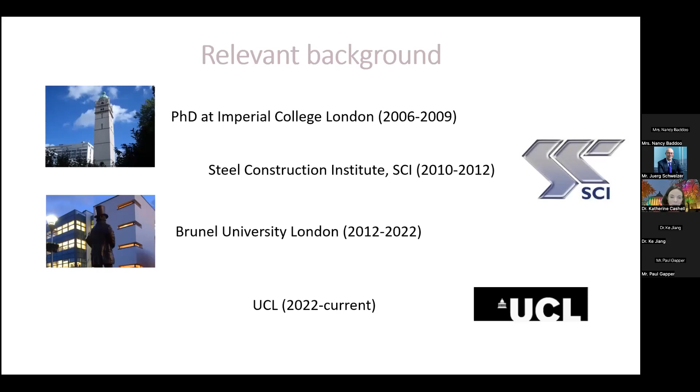It was really only in very recent years that we started to delve a little more into rebar, and I currently work at UCL. My own research background and the topics I spend a lot of time thinking about: my real background is in steel and composite structures, with a particular focus on structural fire engineering - a lot of testing, numerical analysis, design methods. In more recent years, we've started to do a lot more work into different types of materials, particularly stainless steel, but also high strength steels, FRPs, new shapes - anything which can lower the carbon footprint of the structures we're designing. Stainless steel has a big role to play in that endeavor.

I'll put this out here straight away: what I am not is a corrosion expert. I am absolutely not someone who knows a huge amount about corrosion in any context, particularly the different types of corrosion - this can be quite a complex subject for bare stainless steel, but also for rebar. But we'll touch a little more on that as we go through today's presentation.

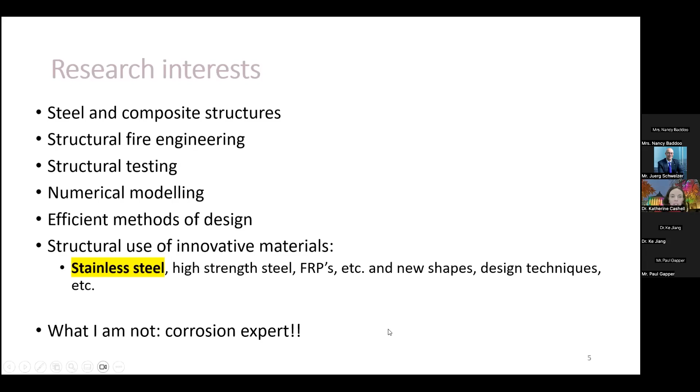Often those two things, the sustainability and the resilience under extreme loading conditions, can be quite conflicting, in the sense that our way of making something more resilient is often to use more material, which of course is unsustainable. It's in that context that materials like stainless steel have a very important role to play, because they can achieve both things when used appropriately.

But of course, we need a lot of research and data in order to enable us to use it effectively and efficiently.

I quite like this quote, which is why I included it here, which says that in a future of scarce raw materials and an energy crisis, it is both uneconomical and irresponsible to employ materials other than those which offer the maximum potential. So that's where I come at my research for stainless steel, which is that we're using a material which is a finite resource, but if we use it carefully and effectively and efficiently, and exploit all of its excellent characteristics in design, it can lead to a better outcome.

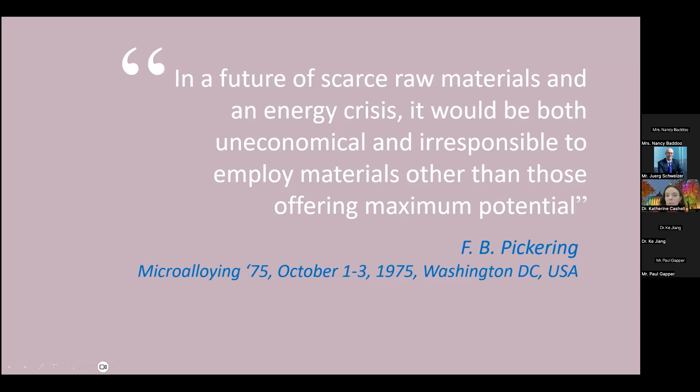Moving a little bit more into the topic of stainless steel reinforcement and the motivation for using it. This is obviously the third session on stainless steel, Nancy having delivered the ones for the last couple of weeks, so most of you will now be aware of the major attributes of stainless steel as a material.

Concrete, on the other hand, is... well, I was going to say it's an unpopular material. That's obviously not true - it's a hugely popular material, but it's getting a bit of a bad reputation at the moment because it's not particularly sustainable. But it's the most used material globally for infrastructure projects, so it's a hugely important material in the context of the built environment.

Corrosion of rebar in structural concrete is a major problem for reinforced concrete structures. It's not just a structural problem, but also an economic problem. It obviously costs a lot of money to repair corroded steel in concrete structures, and it can have even bigger costs in an indirect way when things like bridges and other parts of infrastructure need to be closed for repair works. So there's a real financial cost to the corrosion problem of rebar in concrete. Rehabilitation and strengthening is hugely expensive and can also require a lot of monitoring and maintenance ongoing during the life cycle of a structure.

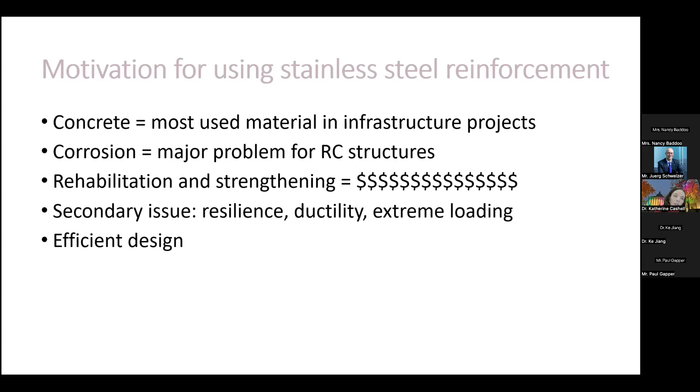Efficient design is another motivation for using stainless steel reinforcement. Again, it's trying to get the very most out of our materials. When we do use materials, we need to use them effectively and efficiently.

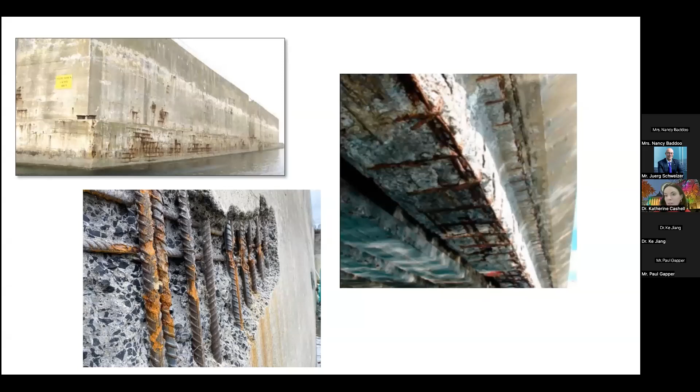Here I have a couple of nice pictures - nice, if you're that way inclined - of scenarios where stainless steel reinforcement might have been a good idea. We're looking here at coastal applications where there's been some degradation to the concrete and the rebar becomes exposed and rusts under that harsh environment. Repairing these sorts of structures or structural defects is hugely expensive, hugely difficult, but also very important for the infrastructure they are providing.

This is another picture which I include simply because I took it last year myself when I was on holiday in the Middle East. Found myself under a bridge one day, looked up - a bridge that was over a river - and this was the rebar exposed under the bridge, which appalled me a little bit. But again, another nice example of where stainless steel reinforcement may have been a good option.

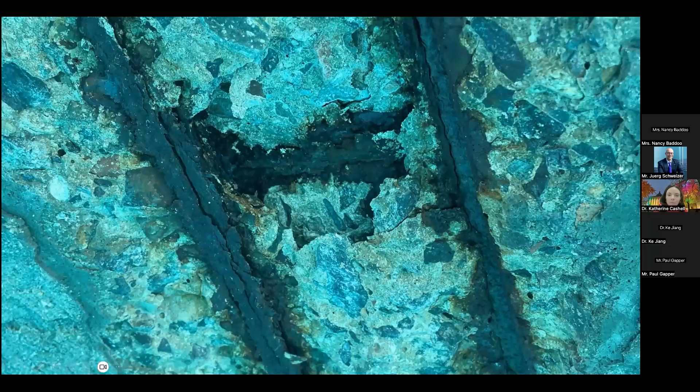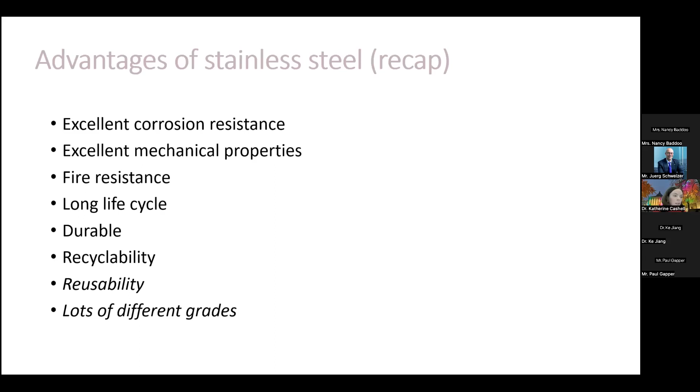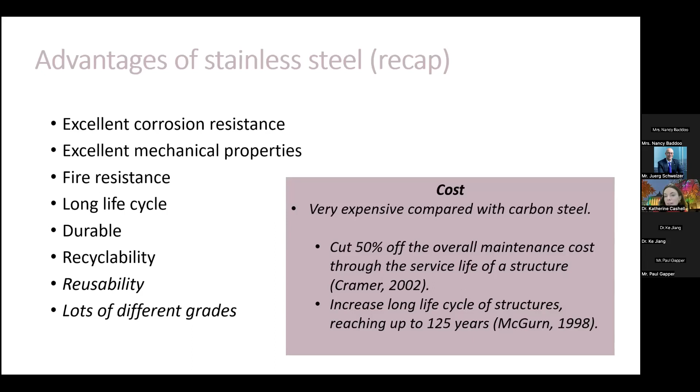A little bit on the cost, because that's obviously often seen as a prohibitive factor in the specification of stainless steel. It is expensive compared with carbon steel, but of course that's only when we take into account the initial costs. It can cut up to 50% off the overall maintenance costs through the service life of a structure, and can increase the life cycle, so the length that our structures can remain in service. And that's a really important factor given the climate crisis that we're currently living in.

So why would you use stainless steel reinforcement? Again, the obvious one is the corrosion resistance, but drilling into that a little bit further, carbon steel reinforcement obviously corrodes when exposed, but when it does corrode, the volume of it can increase by up to 10 times the original cross-sectional volume, which can cause cracking and surface staining in the surrounding concrete.

This, of course, means that more water gets in, the oxygen and the chlorides can accelerate the attack on the steel, which further propagates the problem. This can lead to concrete spalling, further corrosion, and ultimately and potentially structural failure. On the other hand, of course, stainless steel reinforcement doesn't corrode typically, and its inherent corrosion resistance, even when exposed to chlorides in concrete, is what makes it so valuable for this application.

There are other measures for tackling the corrosion problem in reinforced concrete. But studies have shown that using stainless steel as a reinforcement can provide a better long-term solution than galvanized rebars, for example. It's easier to manage and install compared with epoxy-coated rebars.

Cathodic protection is another typical solution that's used to avoid the corrosion problem in reinforced concrete. And this can be effective, but it does also come with some challenges, such as that the reinforcement needs to be continuous, and it requires regular monitoring and maintenance, which again is costly in terms of resources.

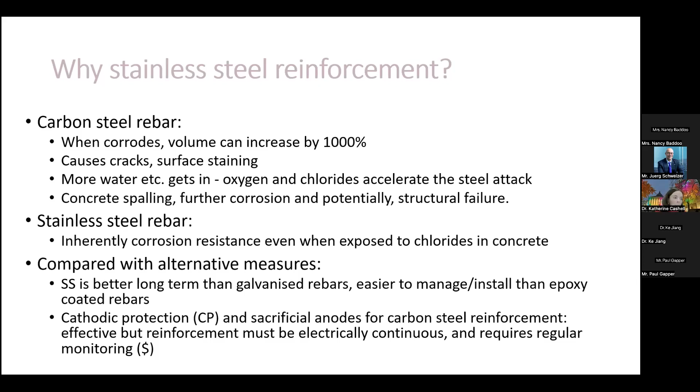So in summary, the arguments for using stainless steel rebars are its durability, which is, I guess, the most obvious one. Its longevity is really important. Potentially the possibility to reduce concrete cover, which of course can then reduce the amount of concrete that we need. It reduces the weight of our structures.

Increasing the ductility of reinforced concrete members is something we can really exploit with stainless steel, due to the really high level of strain hardening we get in the material. So using that in design is of value.

Reducing the maximum design crack width is an interesting one, because you have to ask, do we care about crack widths when designing with stainless steel rebar? From a deflection and serviceability point of view we'll always care about crack widths, but they become less of a driving force with stainless steel reinforcement. There's also eliminating costs associated with coating of rebars and cement inhibitors, and finally, extending the life and minimizing the need for ongoing costs and use of resources during the lifetime of a structure.

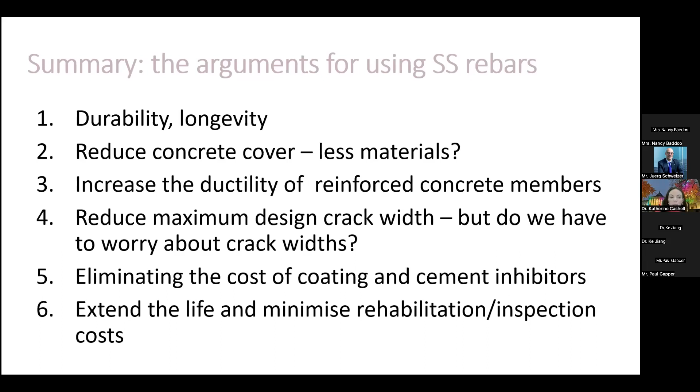So the arguments for using stainless steel rebar are hopefully there and clear, which brings us to the next part of our talk: looking at some of the codified provisions and developments. Before I get too into this, I want to manage your expectations by saying there's very little in the codes about stainless steel reinforcement. It's really still quite a new topic, and lots of what I've mentioned so far is semi-obvious, but we're still lacking a lot of performance data, which would be required in order to incorporate these things into our design codes.

So the design codes as they stand really started from a structural point of view in the 1980s. During that decade in the United States, much of the infrastructure, including reinforced concrete highway bridges, suffered from severe reinforcement corrosion, and many of the bridges actually failed. This exact observation also occurred in the UK.

In the UK, as things developed in the 1990s, there was a revision to the document BA 84/02, the design manual for roads and bridges. For the first time, stainless steel reinforcement was included in that design guide. It required stainless steel reinforcement to be used around slab penetrations, splash zones, particularly in bridges, or wherever severe disruption would occur if the carbon steel corroded. Interestingly, it also allowed for some relaxed durability requirements, so lower cover, 30 millimeters rather than 50 millimeters as was standard for carbon steel, and wider cracks were also permitted. So there was a relaxation in some of the durability requirements.

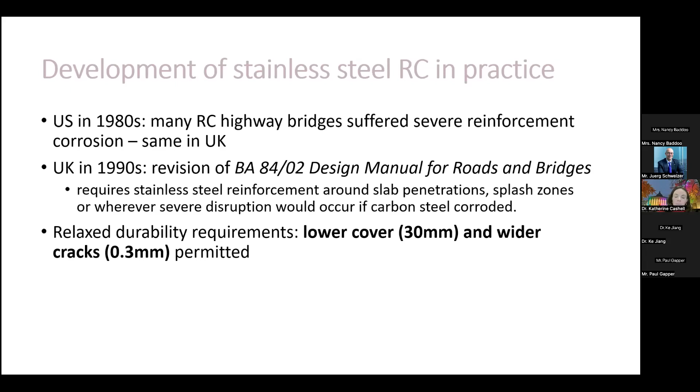Moving on to international design standards: New Zealand's own design standard for concrete structures, 3101, does not include any provision for stainless steel rebar. Perhaps someone on the webinar might tell me different, but I'm unsure if there are any plans for it to be included or if it's on the radar at all.

For Eurocode 2, we're currently undergoing what's called the second generation of the Eurocodes, the whole suite of European design standards. The new edition, which should be out in the next year or two — it's not the fastest moving operation — will include some design recommendations for stainless steel reinforcement as an additional annex to the main Eurocode. Also, FRP reinforcement will be included in that. So that's quite a step forward in the design context.

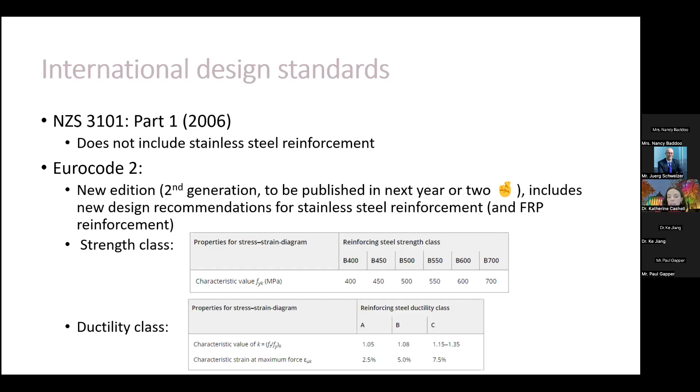I'm putting in here a couple of the key provisions that will be included for stainless steel reinforcement. I must say they're not particularly different to those for carbon steel, and that's mainly owing to a lack of data and performance data and reliability studies, as this is still quite a new topic. So the strength classes as provided are exactly the same as they are for carbon steel, as are the ductility classes. The way the material is qualified is very similar, in fact the same, as it is for carbon steel in Eurocode 2, the European design standard for concrete structures.

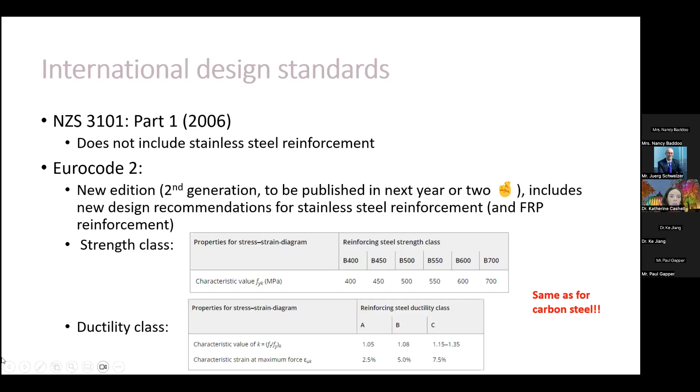This is the official name of Eurocode 2, EN 1992, and it is yet to be published, but it will include Annex Q, which is a normative annex dedicated completely to stainless steel reinforcement.

Interestingly, in terms of material mechanical properties, as I said, they're all exactly the same for stainless steel as they are for carbon steel, except for a couple of things. Number one is fatigue.

In terms of fatigue, owing primarily to a lack of sufficient test data and research on this topic, the code states that while carbon steel must pass a test during 2 million cycles, stainless steel is required to pass 5 million cycles. So testing to a more extreme limit owing to the lack of performance data. And the values for stainless steel are only given for the B500 strength class of rebar.

On the ductility side, we know that stainless steel is a very ductile material, and therefore, although it must fulfill the same values of the ductility classes as given for carbon steel for design, the ratio of the 7% strength to the 0.2% proof strength is used rather than the tensile strength as it would be for carbon steel. So there's a little bit of allowance made for the ductility of the material. But I think we're all aware, those of us that work in stainless steel, that this is underplaying the potential that stainless steel has in terms of its strain hardening.

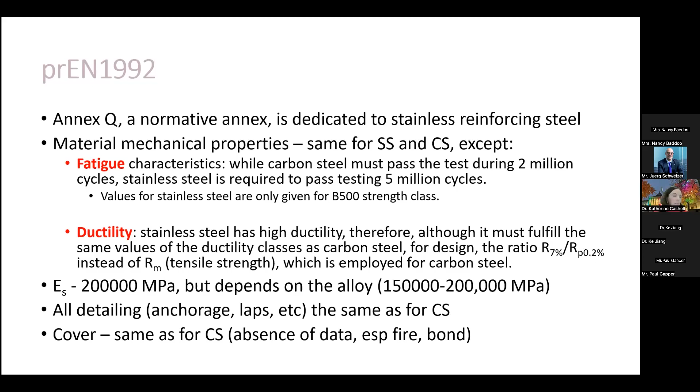So, barriers to using stainless steel rebars: the main barriers are perceptions of cost, and questions around galvanic acceleration of corrosion - can it be used together with carbon steel rebars, for example? Actually, research has shown that yes, it can be, that there's no galvanic acceleration of carbon steel corrosion when it's used together with stainless steel. Product forms, availability, and questions around chloride resistance - these are the primary barriers to using stainless steel rebars.

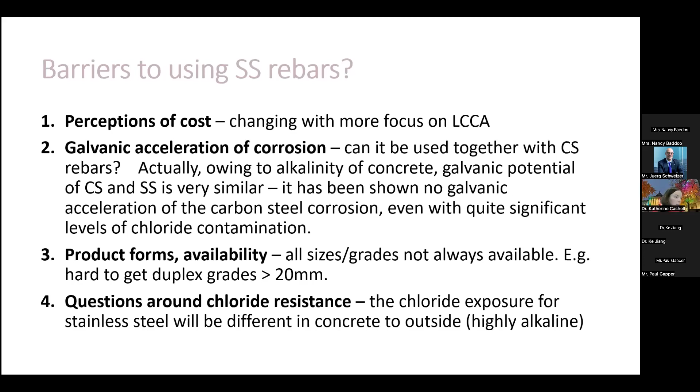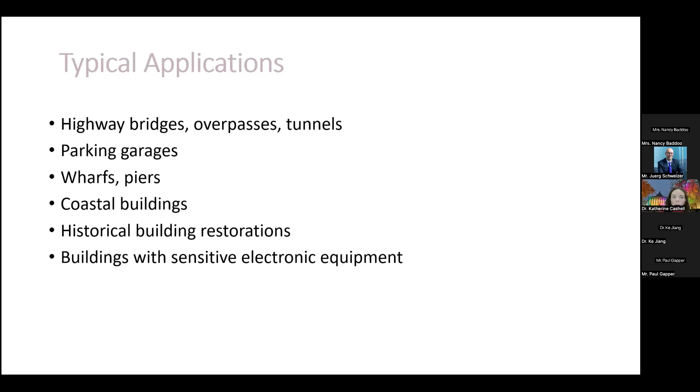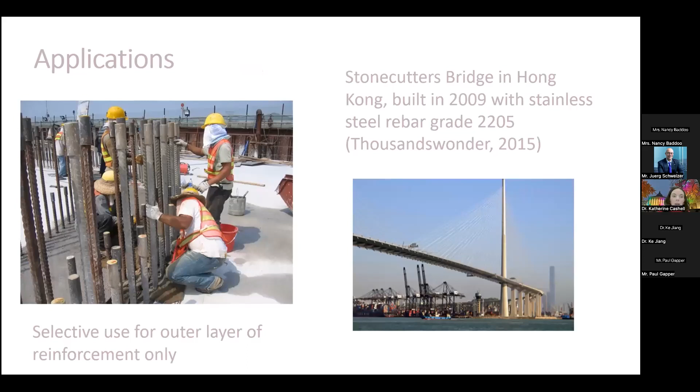Moving on, and I'll fly through the next few slides, looking at a few applications and developments. Typical applications, as you might imagine, are highway bridges, parking garages, piers, coastal buildings, and so on. Here I have some images of where it's been used. We have Stonecutters Bridge in Hong Kong, which used grade 2205 duplex stainless steel rebar.

In many applications it's selective use - stainless steel is often only used in the splash zones, or only in the parts of the structure susceptible to corrosion. So it's often used together with carbon steel rebar.

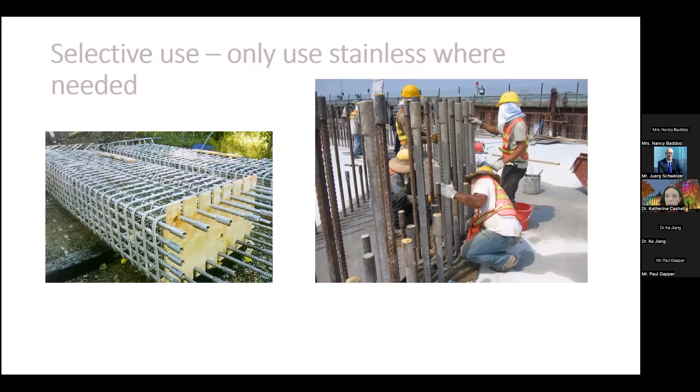Here we have a bridge, maybe Schaffhausen, in Switzerland, which used 15 tons of stainless steel rebar, and interestingly saved 13% of the life cycle cost over an 80-year design life. So really, when the life cycle cost is taken into account, stainless steel rebar packs a very decent punch.

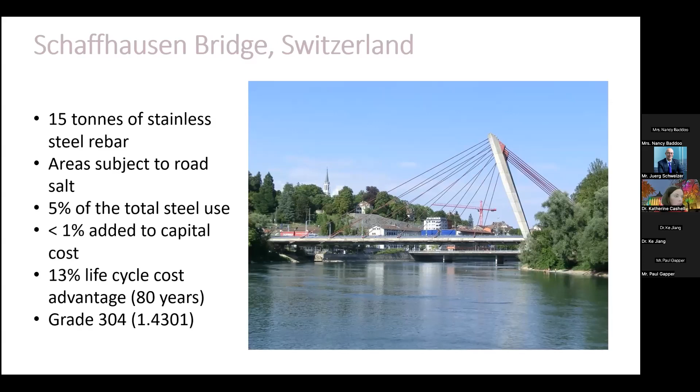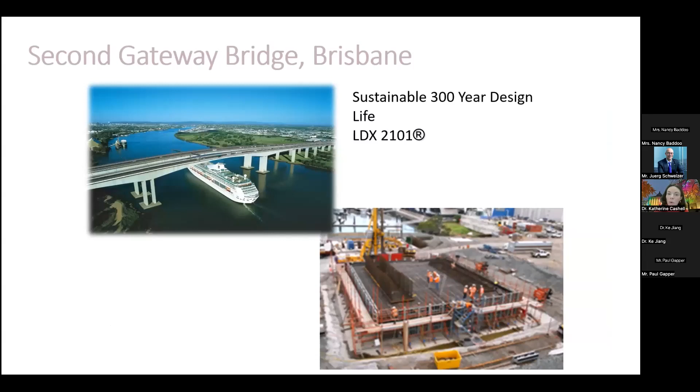A couple of applications, not quite in New Zealand, but a bit closer to home. Here we have a bridge in Brisbane, which uses Lean Duplex 2101. And it was also used in the seawall in Sydney Harbour, which was a rehabilitation.

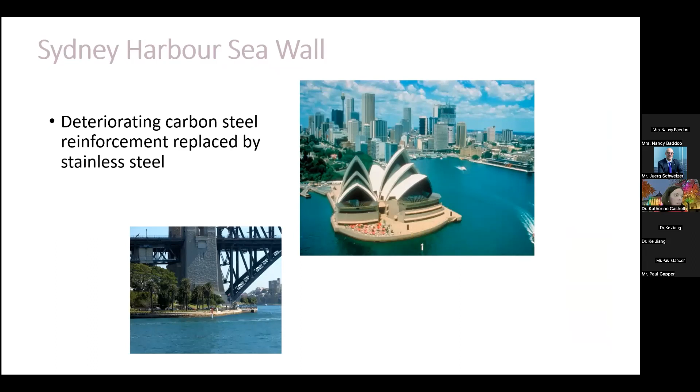So very briefly, I've covered a lot of this already, but just to summarize some of the developments over the last 30 years. In 1995 there was a basic British standard material standard for rebar, but it only included 2 grades - now we have many more grades. On the right-hand side of this table you'll see the current status. Production was really quite niche 30 years ago, whereas now it's being produced by many producers.

There was very limited data on atmospheric exposure, the effect of pH and alkalinity, and there's a little bit more information on this now. There were absolutely no design rules, and now there are limited design rules, but there's more research happening all the time, as we will discuss in a moment.

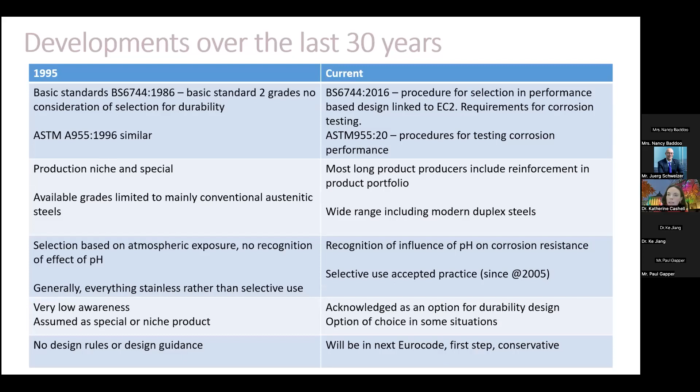Briefly on the chloride accumulation, this graph shows the accumulation of chlorides in concrete with depth and over time.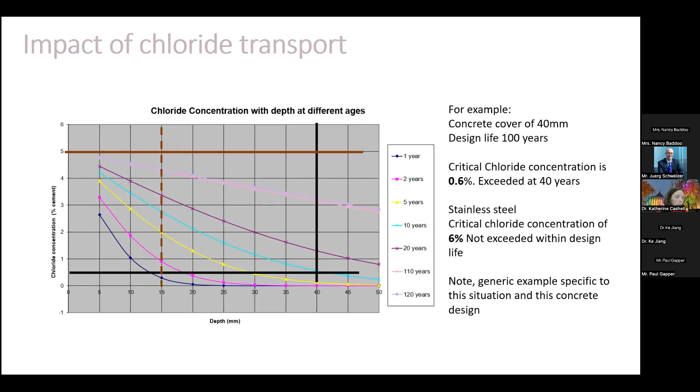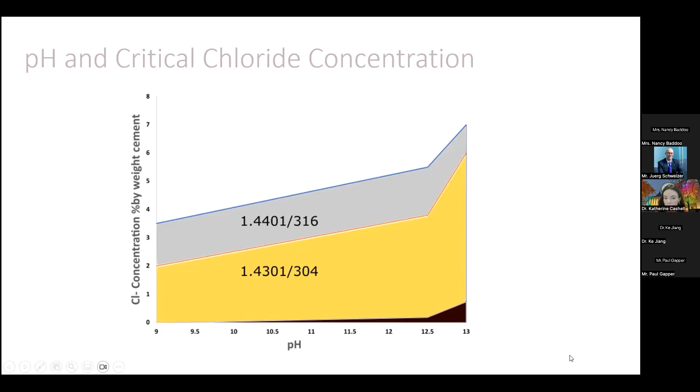Again, taking a look at that critical chloride concentration: here we have 316 on top, and for high pH values, which would be appropriate for an in-concrete situation, we get quite a high critical chloride concentration value, very high for 316, a little bit lower for 304. Carbon steel is down at the bottom in black, and it is much, much lower.

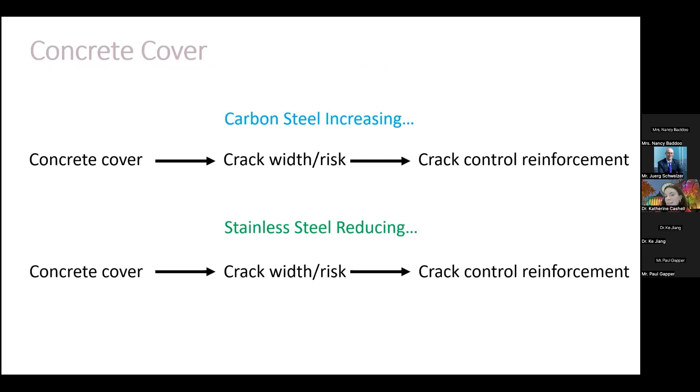What all this gets us, or results in, is that with stainless steel we can potentially use less concrete cover, less crack width and risks associated with crack widths, which then means less requirements for crack control.

Okay, so moving on quickly to product availability and the available grades. I must confess I haven't got a huge amount of information local to you in New Zealand, but I will present a couple of slides on the different grades.

It's available generally in a number of austenitic grades and duplex grades. Actually, it's grade 1.4362, in the middle of this table, which is the most commonly used grade of stainless steel specified in structures for rebar—a duplex stainless steel, a lean duplex stainless steel.

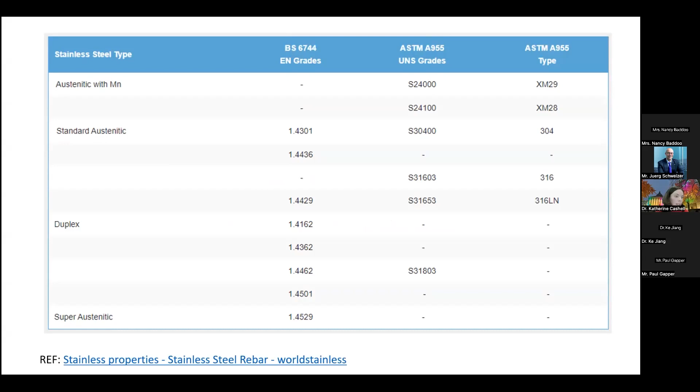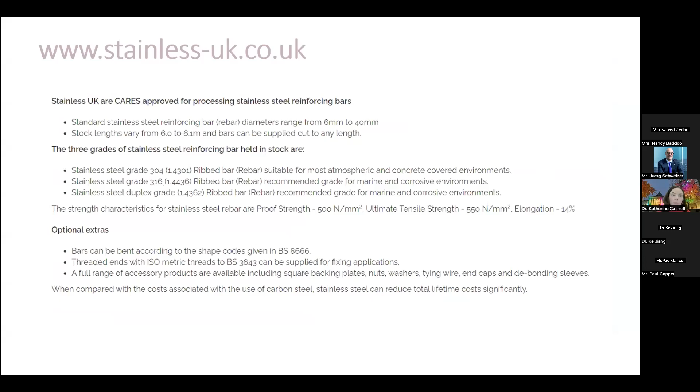Taking a screenshot from a stainless steel supplier in the UK, you can see they supply 304, 316, and this duplex grade 4362, which is really the most popular and most used one in real applications. A quick look at some New Zealand suppliers, Ancon here, and they also provide very similar grades.

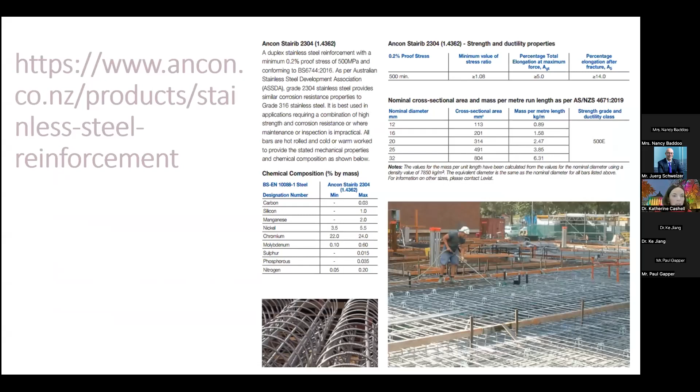I won't dwell on this because you can look it up yourselves, but it is an available product in New Zealand.

The recent research findings I'm going to go through quite quickly. I believe these slides will be shared with you after the presentation, so you can take a closer look yourselves or contact me offline if you wish.

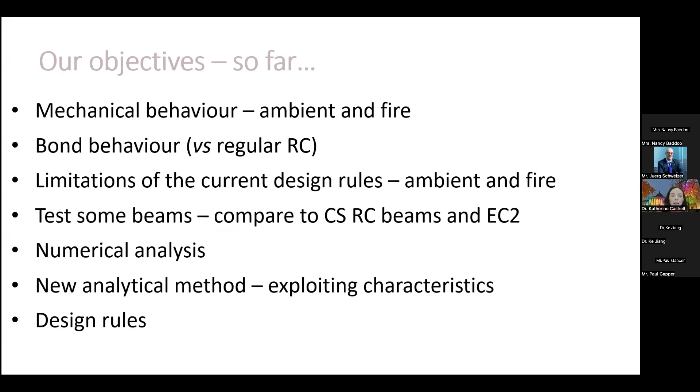Together with some of the researchers I work with and PhD students, we've been looking quite a lot at trying to provide performance data for stainless steel rebar—looking at the mechanical behavior under normal and fire conditions, the bond behavior, which is so important, limitations on design rules, and some new analysis methods also.

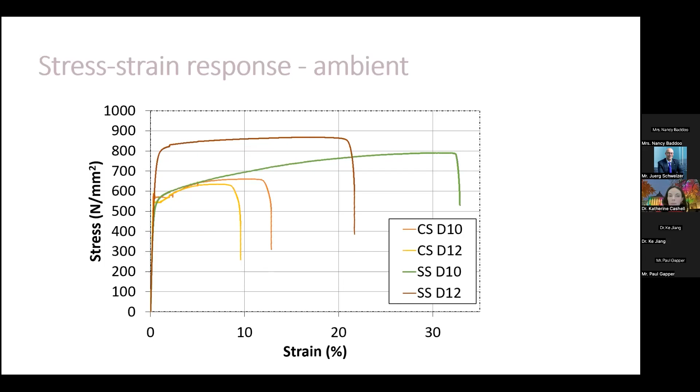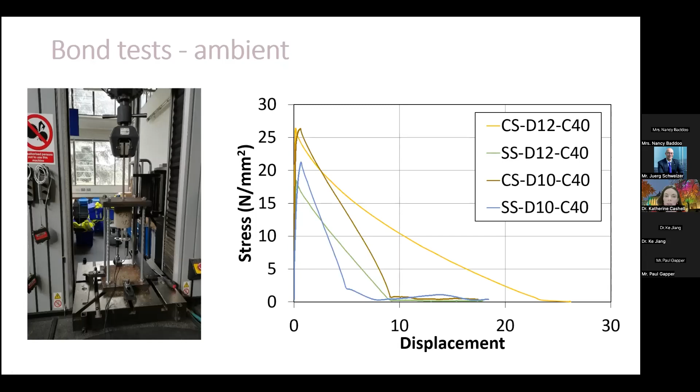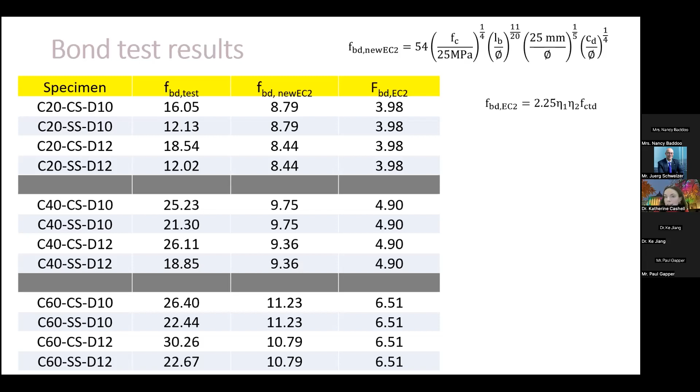We took those bond tests, and we've compared the bond strength of the stainless steel with the European Eurocode 2 bond rules, and stainless steel is still completely on the conservative side. So although it doesn't develop quite as high levels of bond strength as carbon steel, it is certainly still well above that which is required in design.

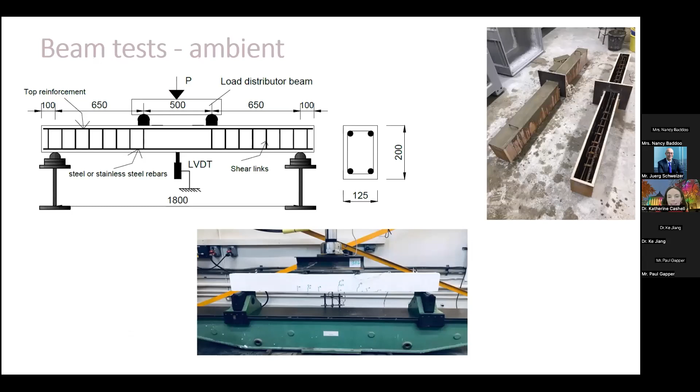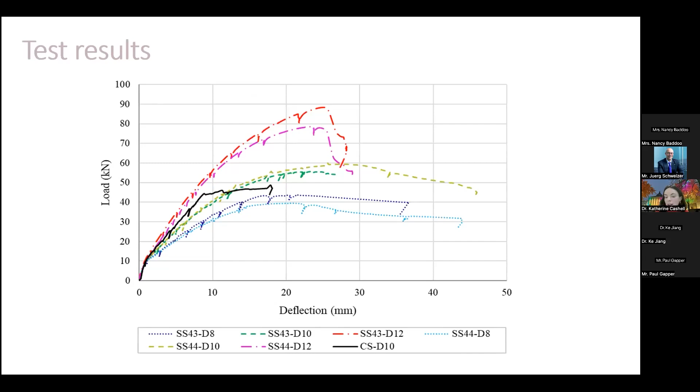We've also done some beam tests, looking at the development of cracking and different reinforcement ratios and cover distances. Generally, as you would expect, we found a lot more ductility, and failure does not occur at such an early stage for a stainless steel reinforced concrete member.

Sorry, went a bit fast.

So yes, we were looking again at doing some numerical analysis, trying to really understand the important parameters causing and forcing the development of cracks and the increase in deflections. So using our experimental data to validate some numerical simulations, and we've had some really positive results from that.

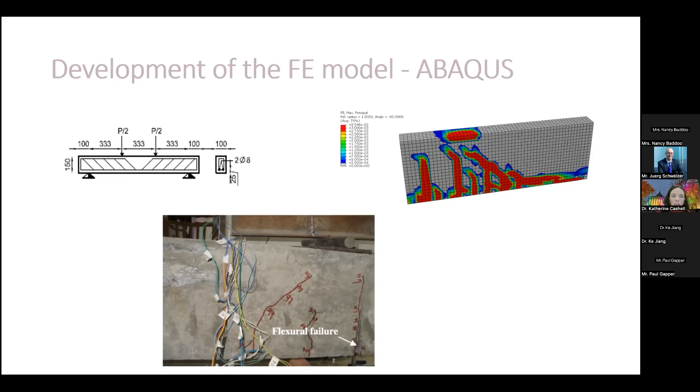Using all that data, what we really wanted to work on is trying to come up with ways of exploiting the very positive attributes of stainless steel by using the strain hardening, strength and ductility in design. Current design approaches, certainly those in Eurocode 2 and in the New Zealand Code, don't allow for that.

So we've been trying to use - I think Nancy has, if she hasn't talked about it already, next week's webinar will talk about this continuous strength method: new design methods which can enhance the design, come up with a more accurate design prediction for the capacity of sections using the real material properties of the stainless steel.

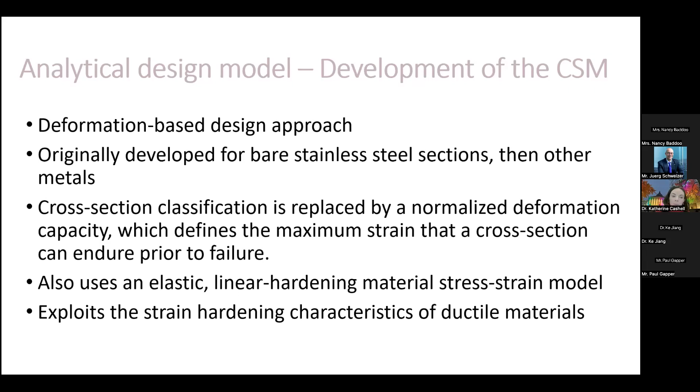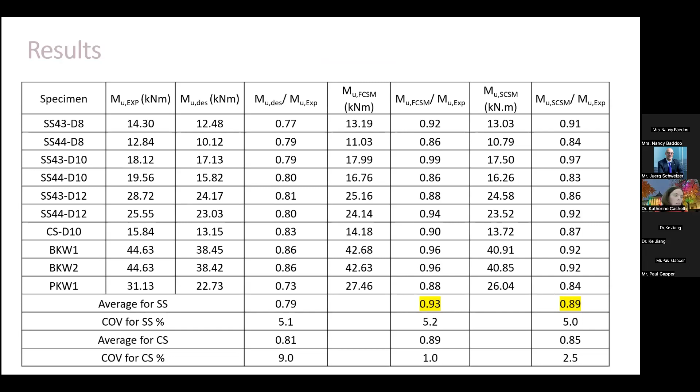Just a summary of some of the key findings from our research studies: generally, the capacity is higher for stainless steel reinforced concrete members, with better ductility, a more non-linear, rounded, gradual response compared with carbon steel reinforced concrete.

Current design expressions in the Eurocode are overly conservative for stainless steel reinforced concrete, and some of our newly developed methods provide a less conservative, less scattered set of data. Cracking was really similar - between the carbon steel and stainless steel beams, the crack patterns and the deflections at which they developed were shown to be really similar.

For the set of tests we looked at, the failure mode was actually different. The stainless steel specimens tended to crush - the concrete crushed - whereas the bars ruptured in the carbon steel equivalent. Again, that's important for ductility and the warning of failure.

Deflections were a bit of an issue. The stainless steel members did deflect further as they progressed through the response, but not as much as we actually anticipated. Still well within the allowable values.

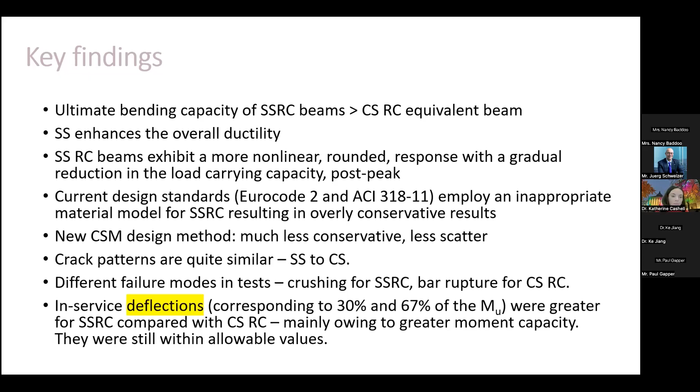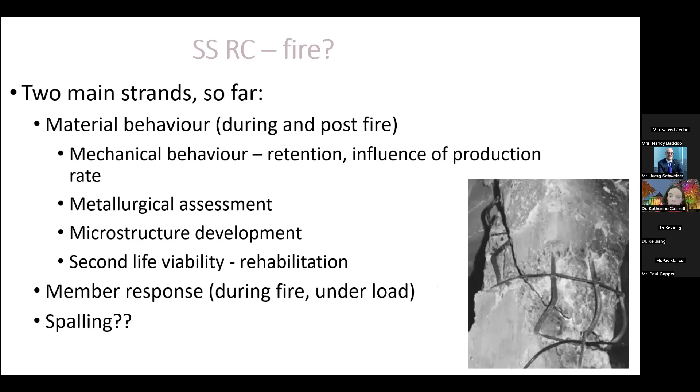We've also looked a little bit at fire, trying to understand the mechanical behavior, the retention of strength and stiffness when a concrete structure might experience a fire scenario, and a little bit on spalling, which I'll come to in a minute.

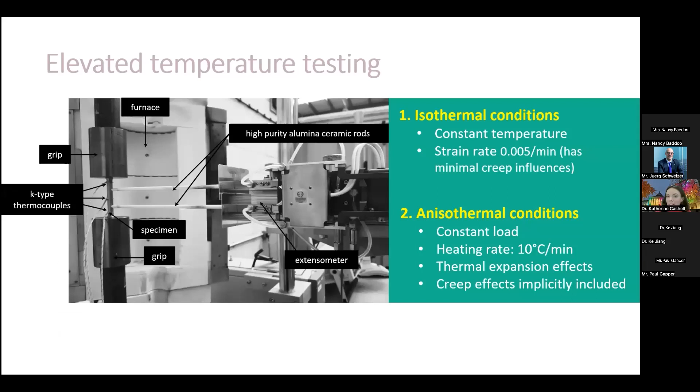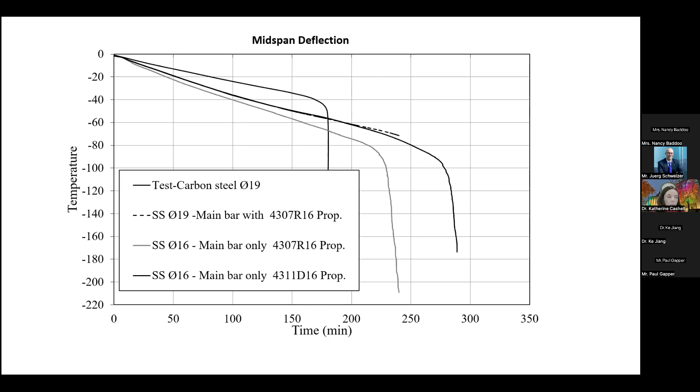You can see, hopefully from this, that the member with stainless steel reinforcement outlasted and performed much better than the carbon steel reinforced concrete member in that fire scenario. The deflections were greater, but in a fire scenario or any extreme scenario, it's really the survival of the element that's of prime importance, and the stainless steel member outlasted the carbon steel member in this scenario. But there's a lot more work to be done in that area.

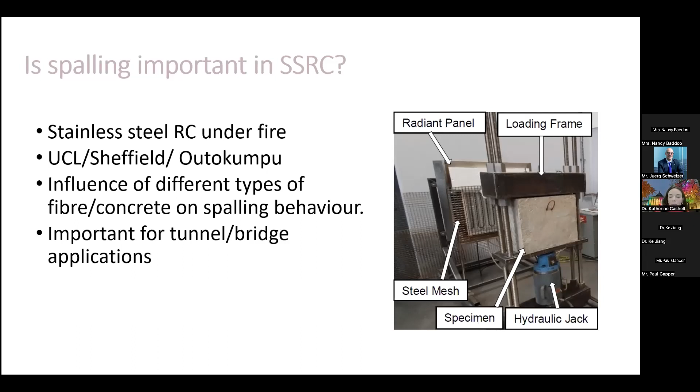We're also looking at spalling. We've got some tests underway at the moment, together with another university in the UK, the University of Sheffield, looking at whether the spalling behavior in concrete is different for stainless steel rebar compared with carbon steel reinforced concrete members. The initial results are showing us that it's not that different, so there's no real issue.

Just like with regular concrete, incorporating fibers into the mix can be very influential and positive for delaying spalling. Indeed, even for only 15 millimeters of cover, we still didn't have any signs of explosive spalling, so that was a very positive outcome from that study.

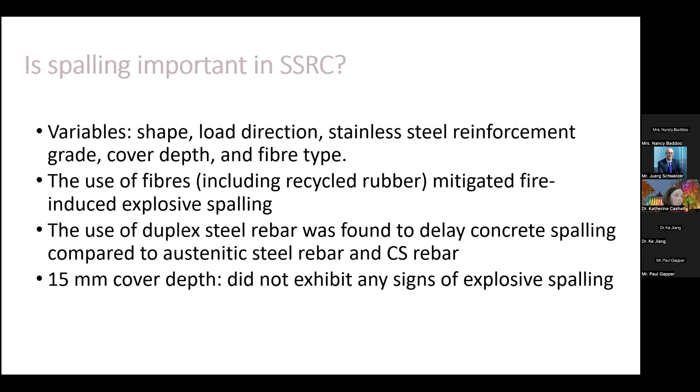Very briefly on the seismic behavior - I'm very conscious that this is obviously such an important issue for you all in New Zealand.

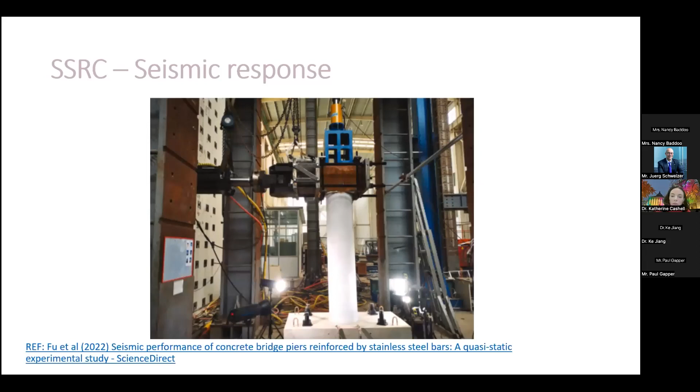There is a lot to be done in this area. I'm not going to pretend like we have that many answers. There's been a couple of sets of tests done. This is an image from the reference given below on some tests done on concrete bridge piers with reinforced concrete, stainless steel reinforced concrete. Quite large scale testing, and there was another set of tests done more recently in Europe.

In summary, the outcomes of this research—I think this is seen as a really good application for stainless steel reinforcement, again owing to the ductility. There was more yield drift and drift at maximum force for the stainless steel reinforced concrete members compared with equivalent carbon steel. The maximum lateral force of the austenitic stainless steel reinforced concrete column was shown to be greater than for the duplex, which was quite interesting.

At the end of the test, it was observed that there was a greater degree of concrete spalling for the carbon steel reinforced concrete member compared to the stainless steel member, but this needs a lot more investigation. The carbon steel column experienced fracture of the rebar, which obviously isn't particularly wanted, due to inelastic buckling, and that did not occur in the stainless steel reinforced concrete member.

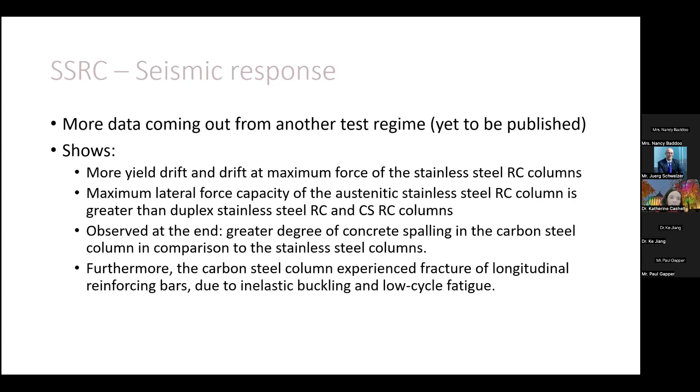So there are some very positive results there which need a lot more exploration, but the early signs are that this can provide a really nice solution.

Before I finish up, and I am nearly finished, a very brief word on some future opportunities and where the gaps are. There are loads of gaps in this topic. We see a lot of potential, but there are a lot of things that we haven't got the data to back up our instincts, for want of a better word.

Some of the things that we really need to look at: different loading conditions, simple things like continuous beams, high shear scenarios. We don't have any information on that.

The last bullet point here, I tend to think is one of the most important, which is true also for carbon steel reinforcement. In light of the corrosion properties and the alkalinity, looking at newer concrete—concrete mixes that are replacing some of the cement with calcined clays, GGBS, fly ash, or any of the other common cement replacement products hitting the market—that's a huge area that we really need to go back to zero and recalibrate all of our design performance data.

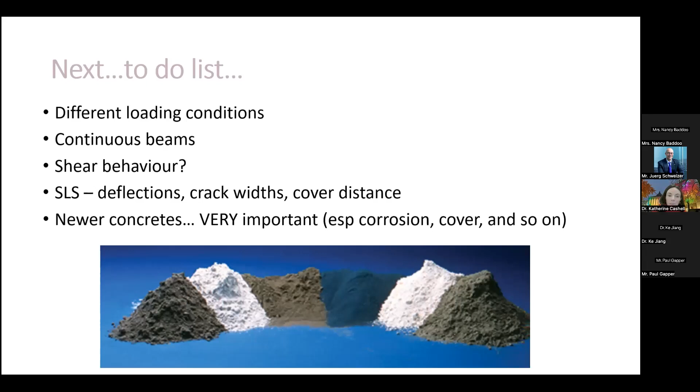In terms of the costs, the economy, which of course then links into the environmental costs also, that's where it can make a really, really big saving.

I think, as design—certainly in Europe, and I'm sure the same in New Zealand—comes under more and more pressure to provide a long life cycle, low maintenance, and low environmental impact solution, stainless steel reinforced concrete can really come into its own, both in terms of direct savings and also those indirect savings when things like bridges need to be shut down for rehabilitation and so on.

But we need more performance data. We need more reliability information, and really we just need more research.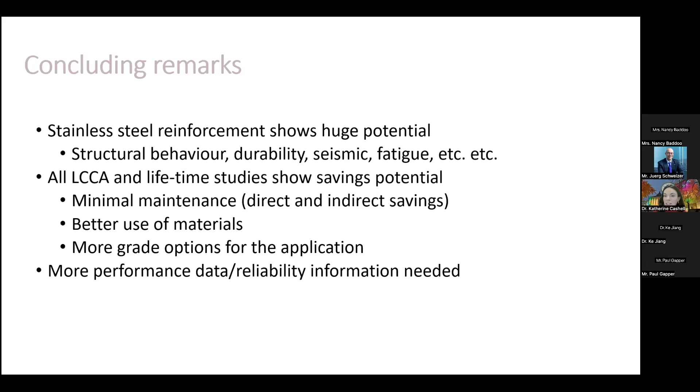I have some useful references here. I don't expect you to look at them now, but when the slides become available, you can have a look at these. A simple Google will tell you quite a lot, but there are some reliable sources here.

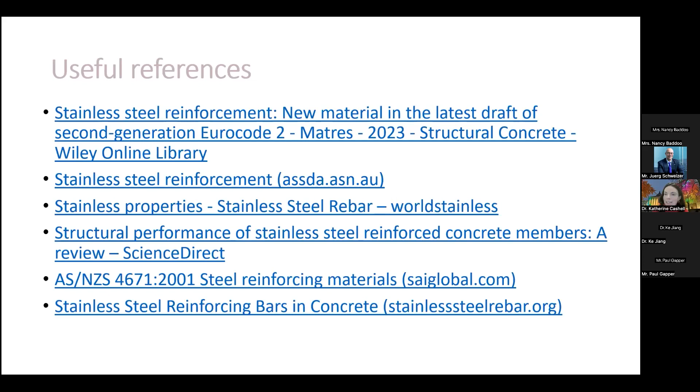And with that, I will end my presentation. That's my last slide, and I'll hand over to...